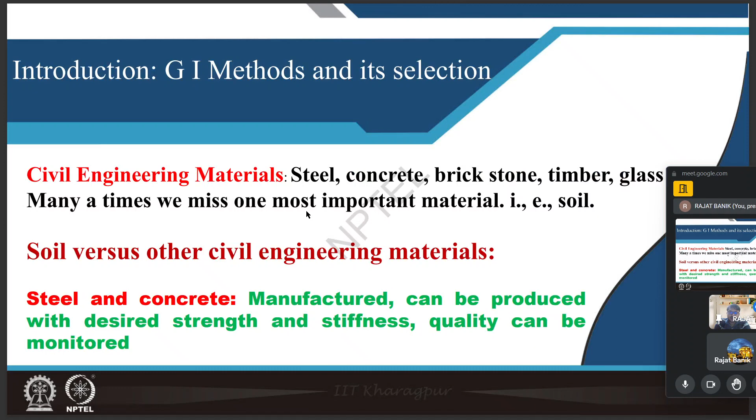In the beginning, we study ground improvement and why we need these ground improvement techniques. Few points were made that like other materials, soil is also a civil engineering material, and it needs improvement because it is formed naturally and its properties are mostly not known or dependent on a manufacturer, with no control over its quality. There may also be increased demand due to urbanization, and we venture into challenging building of high-rise buildings, so we need to improve the ground. For this we use different techniques, that's why we study ground improvement methods.

Then we study the different types of geomaterials and their potential problems. These geomaterials I discussed based on type, natural and fill. In nature we study soft clay, silt, organic soil, loose sand, expansive soil - they are different and have different potential problems, like in soft soil there may be low strength, high compressibility, large creep deformation, low permeability. Silt also has similar types of problems.

Then we study the fill. In fill we study uncontrolled fill, dredged fill, reclaimed fill, recycled material, solid waste and bio-based byproduct material, and also study the different potential problems of these fills. And then we study...

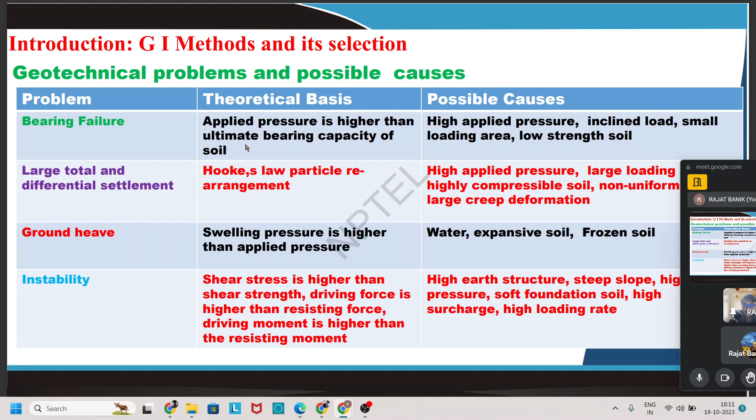Then also other types of problems like liquefaction, erosion, seepage - here also given some causes of why they happen. Liquefaction happens when the effective stress becomes zero, and the soil profile behaves like a liquid. Likewise, seepage occurs due to Darcy's law, you should remember it, it's very important. Then we study ground improvement methods for transportation infrastructure - these are the different types of ground improvement methods used in transportation infrastructure, mostly for improving pavements.

So there you can go through it.

Then we study the classification of ground improvement methods based on different research and different criteria. By Mitchell, it is given by construction and function, categorizing ground improvement techniques based on in situ deep compaction of porous soil, pre-compression, injection and grouting, admixture, and thermal reinforcement.

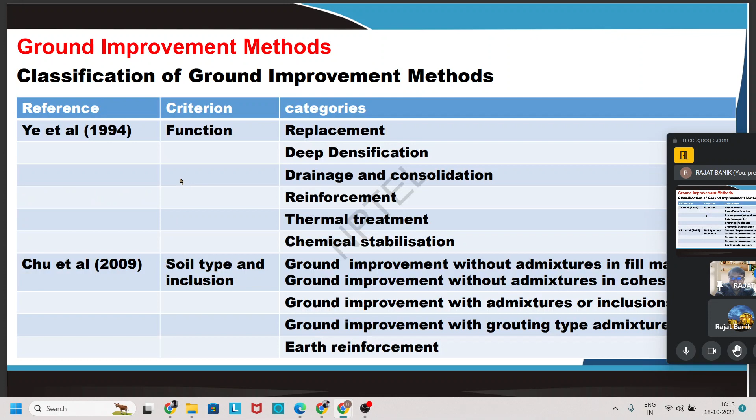Hausmann also classified ground improvement based on process, into four types: mechanical modification, hydraulic modification, physical chemical modification, and modification by inclusion. You can go through it once, as it is not much important. We will elaborately study this now.

Based on our requirement, we divide ground improvement techniques in different ways, like shallow ground improvement technique, deep ground improvement technique, chemical, physical, water or hydraulic ground improvement technique, geosynthetic, and so on.

In shallow ground improvement technique, we mostly use the over-excavation replacement method, and there may be some benefits and some disadvantages. We can also study where this ground improvement technique is mostly applicable. The shallow ground improvement technique is mostly applicable up to a depth of 3 meters. You should remember this.

It is mostly improved by removing the problematic geomaterial and replacing it with good quality geomaterial.

Then we study other surface compaction techniques like traditional compaction, high energy impact roller compaction, and intelligent compaction. We also study where these ground improvement techniques are applicable and how they are applied.

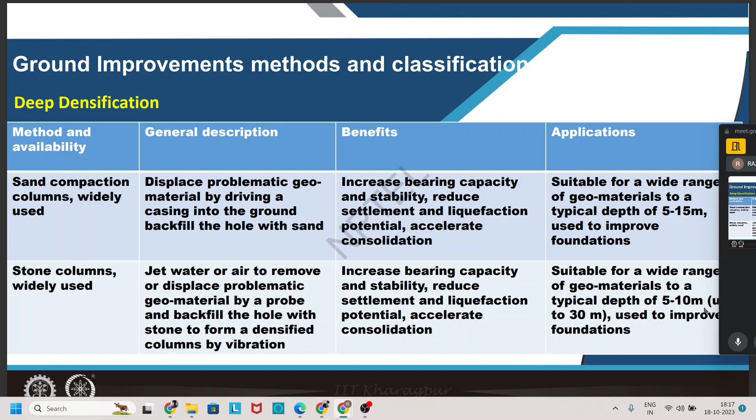Then we study rammed aggregate columns, geosynthetic encased columns, and we see these are applicable up to a depth of 5 to 10 meters.

We again classify ground improvement technique based on drainage, using field drains and drainage geosynthetics. We use these to minimize the possibility of liquefaction in the soil when the groundwater table is close to the ground surface.

By this technique we remove water and lower the groundwater table, also reducing the liquefaction potential.

Then we study other dewatering methods like open pumping and well point systems.

Then we study consolidation methods to improve the ground, like fill preloading and vacuum preloading. This is used to increase strength and reduce settlement in most cases.

We study shallow chemical stabilization, like chemical stabilization of subgrade and base, widely used. This is suitable up to 0.3 meters. By the name itself, it is understood that the depth is not much, so it is up to 0.3 meters.

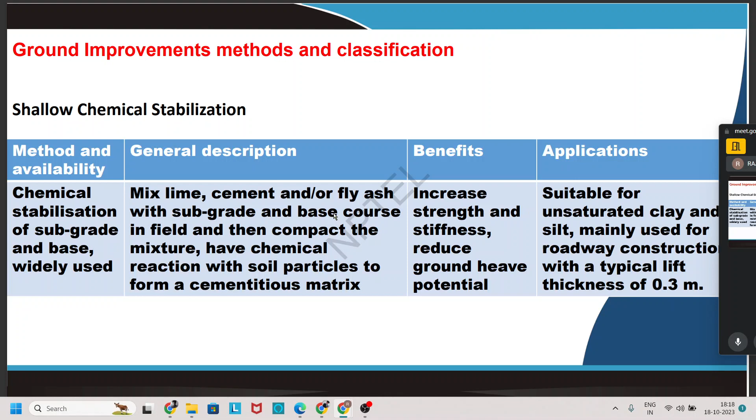Then we study deep chemical stabilization like grouting and deep mixing. Grouting is a very popular technique where we grout good material into the ground and create a hardened mass, improving the ground this way. This grouting technique is mostly used for repairing purposes or temporary work in construction.

Then we study fill reinforcement, which is divided into geosynthetic reinforcement of slopes and geosynthetic reinforcement of embankments. We studied this in the previous class and saw that it increases the stability of slopes and earthwork by inclusion of geosynthetic materials like geotextile and geomembrane. We improve the ground by inclusion of this geosynthetic material.

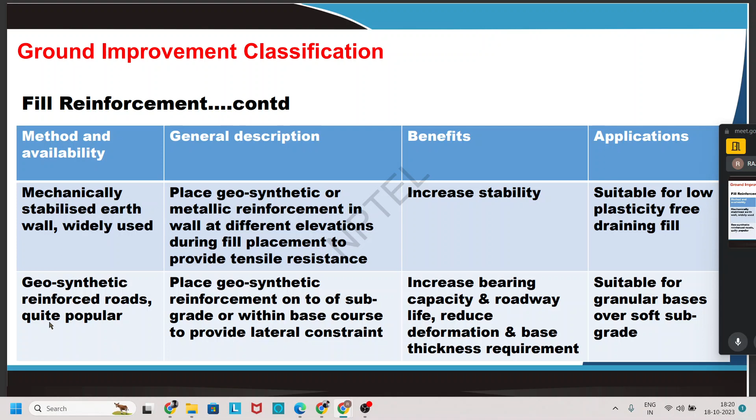Then we study the mechanical stabilized wall. In mechanical stabilized wall, we also solve some problems to find out the stability of this wall, and we also study the geosynthetic reinforced road.

It's very important. Then, in our very first class, we studied the shallow ground improvement technique. The first one is excavation and replacement technique. In this technique, we study that when the depth of the problematic soil is very small from the ground surface, we can replace this problematic soil with a good material.

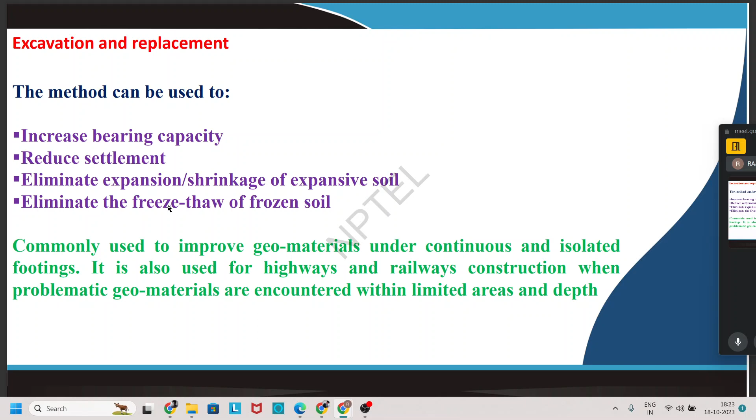Then we study that this technique is useful when the depth is less than 3 meters, and we study that it is mostly used to eliminate expansive or shrinkage type soil, and to eliminate frozen soil. We study the advantages of this.

You should go through it, and we also studied the disadvantages of this technique. So excavation and replacement technique is mostly not used when the groundwater table is very high.

You should remember it. Then we discuss the principle of this study, and the design consideration of excavation replacement. Mostly, the design is based on finding the safe bearing capacity, and we compare whether this soil is capable of taking the load coming from the structure.

If it is okay, then no need to improve. If it is not, we replace this soil or apply good compacted material. After that, we start our construction, and we study the different types of failure modes in this excavation replacement, like general shear failure,

then punching failure, and local shear failure, like this. And we also solve one or two problems using this formula. It is nothing but the safe bearing capacity formula, and all the value coefficients are given, and you should remember it.

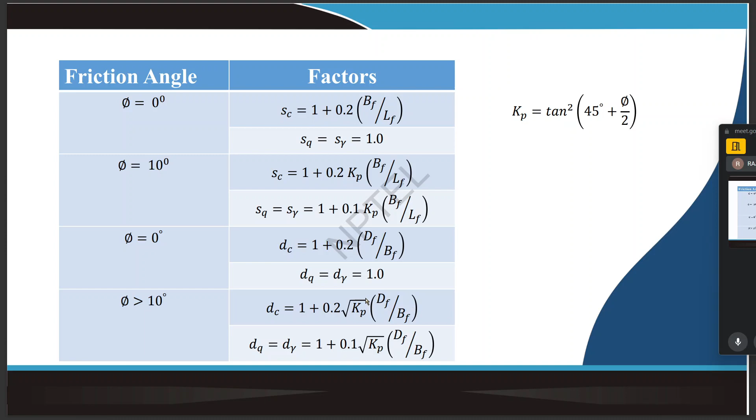Most of the problems are based on phi equal to 0 degree. Also, you should remember what the shape factor and depth factor are when phi is 0 degree. You should remember that Sq and S gamma are 1, and Dq and D gamma are also 1, when phi is equal to 0 degree. You should remember that.

Then, in week 2... please wait, it takes a long time.

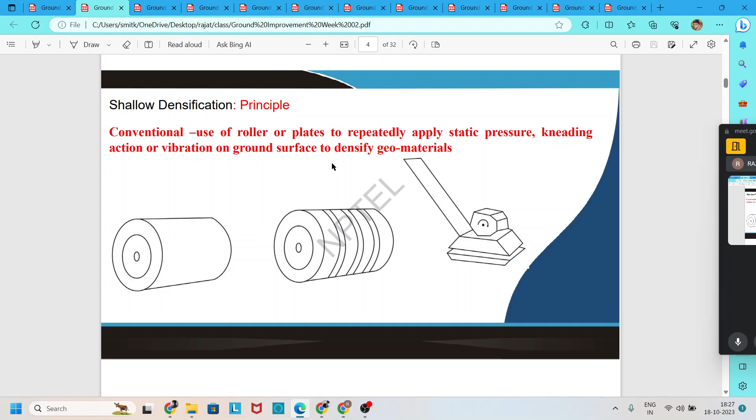Densification takes place. Then we studied the equipment used in shallow densification. There are different types of equipment like sheep foot roller, smooth wheel roller, pneumatic roller.

We study the advantages and limitations of this. You should go through it. It is very important, and this formula also very important.

We solve some problems based on this formula to find out the dry density, which is given bulk density and water content.

Here is given one maximum dry density versus moisture content curve, and you can see there is a theoretical curve due to the zero air void line. It should be parallel to the lower side or right side of this curve.

You should remember it. The left side of this curve is called dry of optimum, and the right side is called wet of optimum, and there are some benefits. You should remember when we use dry of optimum moisture content and when we use wet of optimum moisture content for each type of soil.

Here one curve is also given based on the different energy levels. If the number of blows increases, the curve moves upward, and also the optimum moisture content line shifts to the left side. You should remember this: when we apply more energy, the curve shifts upward, and the value of optimum moisture content shifts left side.

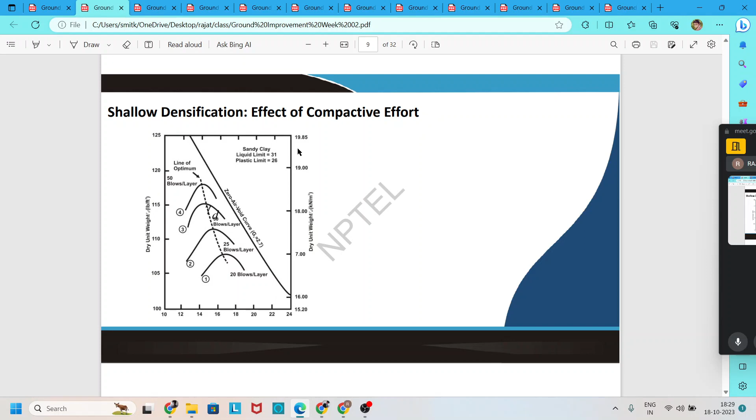If the material is a good material, it requires the maximum density and also requires less optimum moisture content to reach this maximum dry density. You can see different curves given for different types of energy.

Then we study the influential factors of shallow densification, and there may be different types of influence factors like type of soil, moisture content, compaction method, compaction effort, including applied energy, layer thickness, number of passes, relative density or stiffness of this layer.

We study all of this and also solve some problems. Then it is given what type of geomaterial we can use with what type of machine - like for rock fill we use vibratory roller to densify the soil. For plastic soil, which has high compressibility, we use sheep foot roller.

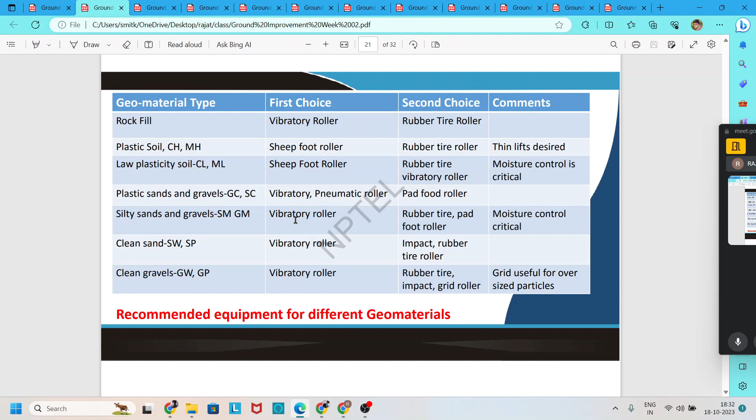You see there are again different types of equipment given and what are the applications or applicability, and we can say the suitability of use of this equipment. You go through it like this.

One problem is given. We solve this problem in our class, and I also uploaded this solved problem on my Google Drive. Let's go through it.

Then in week 3 we discuss about deep dynamic compaction, and there may be different types of deep dynamic compaction like dynamic hammering. We also discuss the advantages and disadvantages.

In deep dynamic compaction, we drop freely a weighted mass on the ground from a certain height, like height is 10 to 40 meters, and the weight of the mass is 5 to 10 tons up to, and that creates some vibration at the ground. Due to this vibration the material comes closer and densifies, and this densification takes place up to a depth of 10 meters.

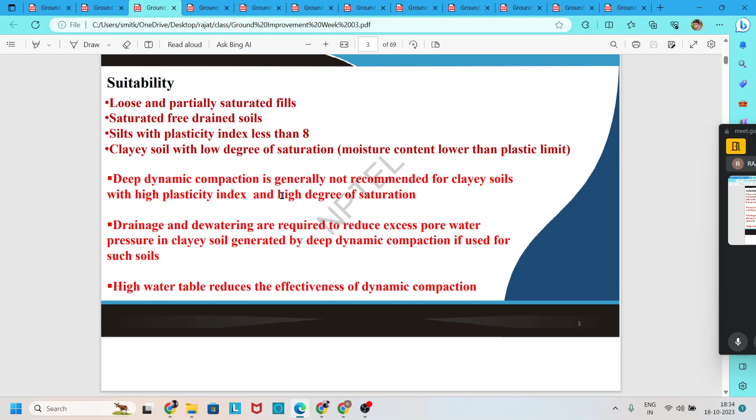We also study the suitability of this technique: the silt percentage, that means plasticity index, should be less than 8, and this technique should not be used for clay soil. For clay soil we use different types of techniques. You should remember this.

We study the adverse situations of this dynamic compaction. It is mostly based on the fact that when the ground water table is very high, we cannot use this technique. Also, if most of the fill material is clay, we cannot use this; we need to adjust something else.

Different adverse situations are given like this. You can go through it once, then see the advantages and disadvantages of this technique. It is a very simple technique; nothing here is very difficult.

Due to this dynamic densification, dynamic consolidation happens, and this dynamic consolidation is mostly used for clay soil, because in clay soil, when we apply energy, it takes time to dissipate the water, and after that it regains its strength. So we can say it is a dynamic consolidation.

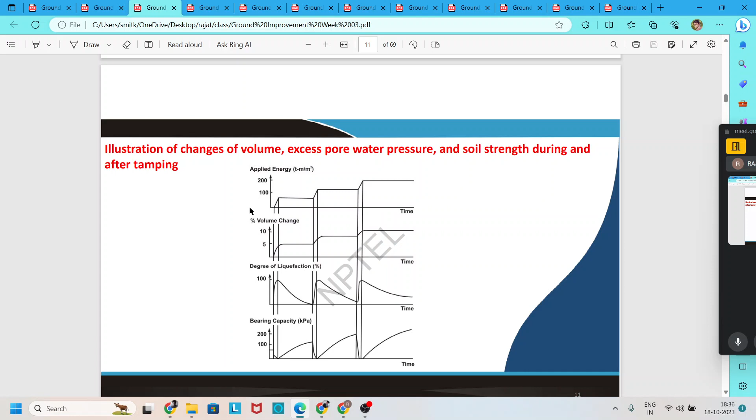Here you can see that for dynamic consolidation, when we apply the energy in the first trial, the volume changes immediately. After a certain period of time, the volume gets constant and reduced. At the same moment, the degree of liquefaction is reduced and bearing capacity increases.

Here is the procedure given in a schematic diagram. First we apply this load up to a certain height, create a free fall drop at the ground surface, and due to this some depression happens. After that, we fill this depression with some good material and compact it again with this heavy hammer, and smooth the surface by normal shallow compaction machines like smooth wheel roller, sheep foot roller, and so on.

Then we study the dynamic replacement method. Before applying this deep dynamic densification, if any compressible layer is present, we can replace it with some good material, and then apply this heavy deep dynamic compaction method by ramming.

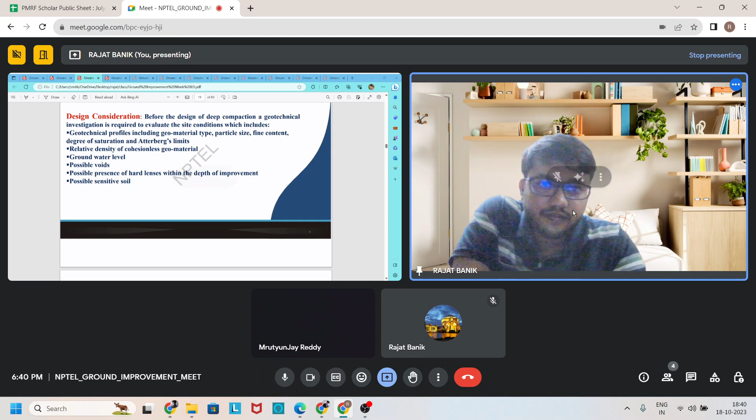Most of the geotechnical design procedure is based on the geo-material type, ground water table presence, and also whether sensitive soil is present or not. You should remember this, but you need not remember that much; just go through it once.

Then, what are the influence factors that govern deep dynamic compaction? It depends on geo-material type, depth of area improvement, tamper geometry, weight, drop height, pattern and spacing, then...

...environmental impact. Also it depends on the presence of soft layer, presence of hard layer. This way, different influence factors govern it.

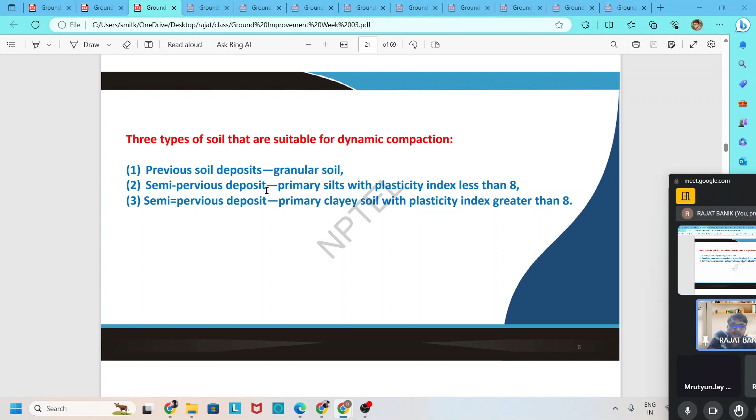Then, soil types for deep dynamic compaction are categorized into three based on pervious, semi-pervious, and impervious. In semi-pervious, it's based on plasticity index less than 8 or plasticity index greater than 8, like that.

Then we design the deep dynamic compaction. First, before designing, we go to the depth of improvement, how much depth we require to improve based on our height and weight of the hammer.

This is found by an empirical formula: Di equals Nc into root over Wt into Hd. Wt into Hd is the energy applied on the ground, and you should remember this term is given in ton-meter. So before solving the problem, consider the units of this term, and Nc is a constant given in the problem.

This technique's depth of improvement for sand is up to 10 meters, and for cohesive soil like clay, up to 5 meters. This is very important; you should remember it.

Here the NC value is given for different geotechnical types and degrees of saturation. For pervious soil with a high degree of saturation, NC is equal to 0.5.

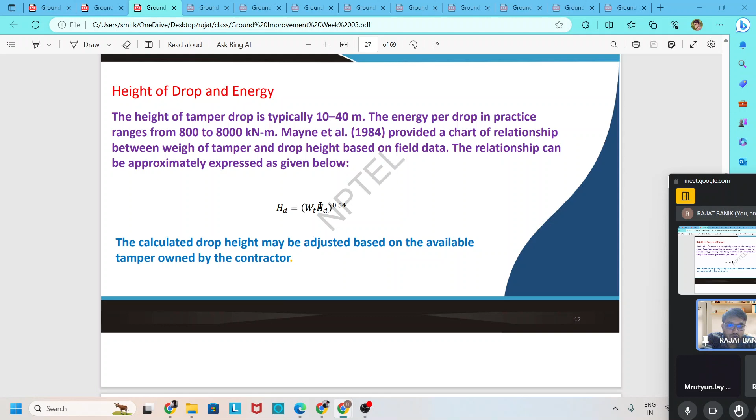After that, for smoothing or leveling, we use the ironing pass, which is based on a smooth roller or sheep's foot roller, like this.

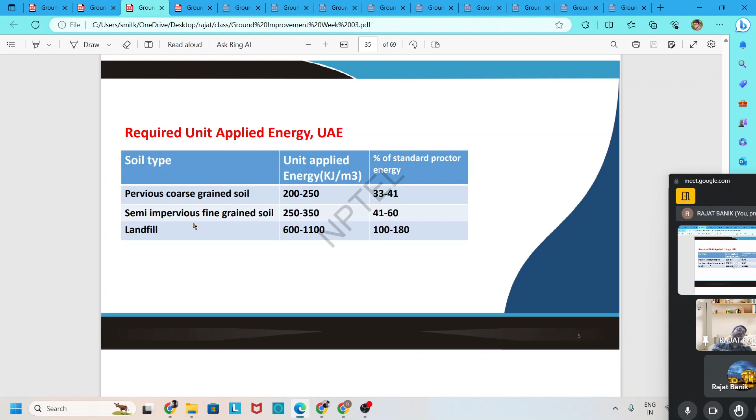We also solved some problems based on this, and you can go through the design criteria of this technique - the induced settlement, that means for different types of soil, up to how much depth this technique works, or how much percentage of soil settlement happens.

Then the most important term is the peak particle velocity.

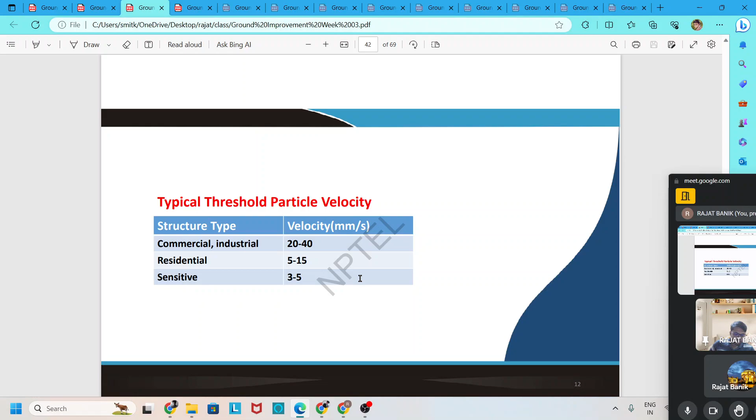For sensitive sites, the peak particle velocity should not be greater than 3 to 5 mm per second. Here is the procedure of this technique: we first prepare the ground, then apply some leveling instrument to find how much depth we require to improve. This may not come in your exam. You should remember the design procedure, design steps, how to design this pattern, and why it is used. We also solve one problem, a very big problem.

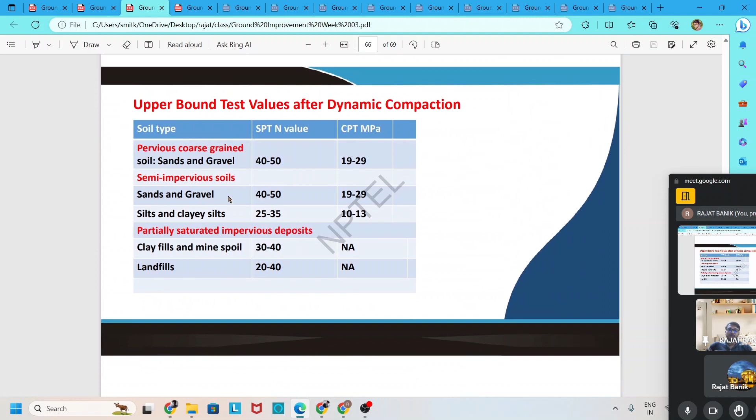It is very important for your exam, and you can go through it. It's a very big design problem. From this problem, you can expect a small portion in your exam. Go step by step and try to solve it by yourself.

Then in week four, we studied rapid impact compaction. It is similar to deep dynamic compaction, but here the drop height is 1.2 meters, and the weight of the hammer is 5 to 12 tons.

It improves the ground up to a depth of 5 to 6 meters, and it is very quick to improve the ground, generating 40 to 60 blows per minute. We also study the suitability.

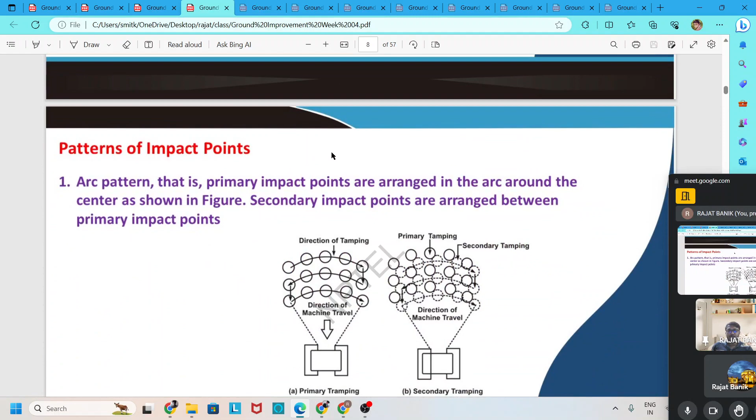Most of the case it is suitable for granular soil, improving the ground up to 6 meters. We study advantages, disadvantages, design considerations, and it is similar. We also study pattern types like square pattern, triangular pattern, and tertiary, with the pattern scaled down into primary, secondary, tertiary.

In primary, the spacing is very large. In secondary, we reduce the spacing, improving the ground in between these two points. In tertiary, which is the last trial, we further reduce the spacing.

Again, the same formula used in deep dynamic compaction is used to find out the applied energy. We also take care of the environmental impact by finding out the peak particle velocity through this empirical formula.

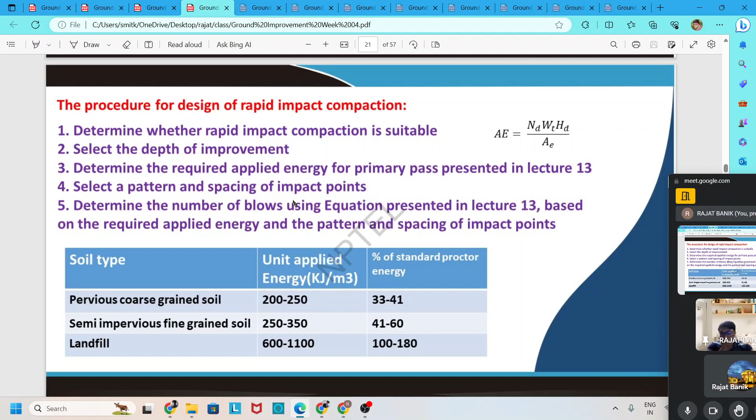By this formula we also solve some problems, and this problem I uploaded to my Google Drive. Please go through it. The solution is also uploaded to the Google Drive, please go through it. Construction procedure: you should go through the problems and the formulas and why it is mostly used, and also go through the different tables given for different types of functions. One by one, go through it.

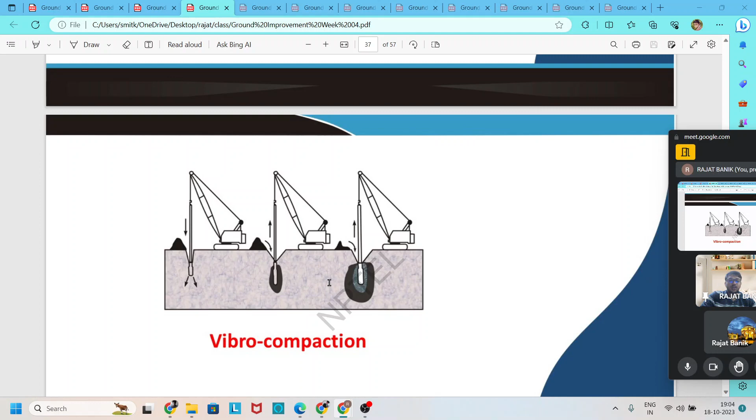We can see this in the picture also: one probe is driven, vibration is created, and there may be some void place created due to the vibration. Particles get closer, and we put some good material on it to improve the ground. This vibrocompaction is suitable for densifying deep deposits of cohesionless geomaterial with up to 20% fines, but less than 2 to 3% clay.

Application, advantage, disadvantage, mechanism is like that. We use this vibrocompaction and generate some force. If the vibration acceleration is greater than 0.5g, then only does the particle-to-particle force break down and compaction take place.

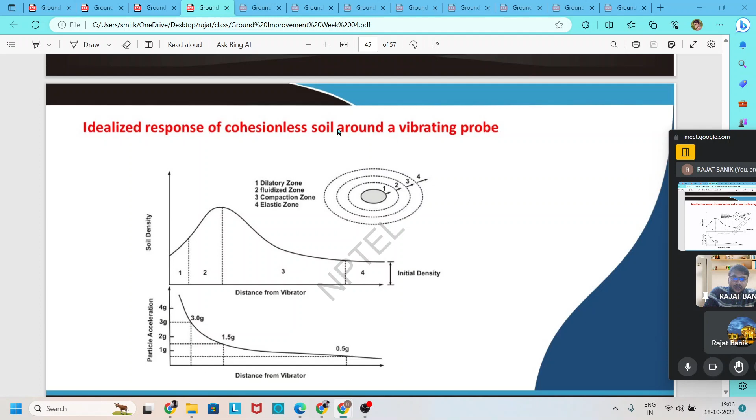So due to this vibration, four zones are created: dilatory zone, fluidized zone, compaction zone, and elastic zone, based on the acceleration. If the acceleration is greater than 0.5, then only this type of four zone is created. Most of the densification takes place at the border of the fluidized zone and compaction zone. We should remember this.

So, I think my presentation is... yes.

We also study one theory to find out the settlement or volume change without backfilling. By this formula, S by H is equal to e naught minus e1 divided by 1 plus e naught. We find out the required volume change of soil without backfilling. S is the depression, H is the height or thickness of the layer.

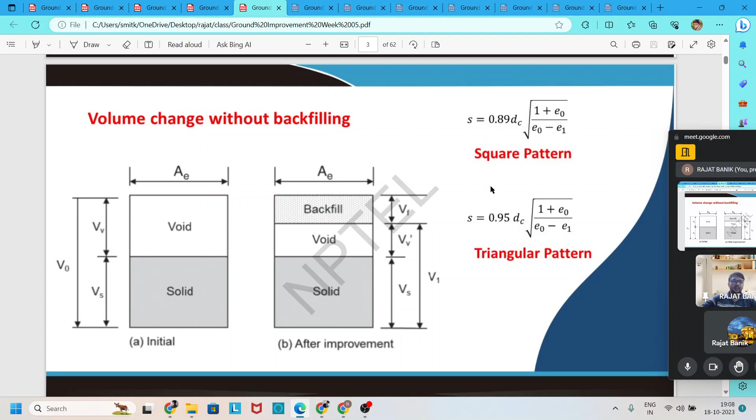In Week 5, we find out the volume change without and with backfilling, and the spacing for different patterns - square pattern and triangular pattern. By this formula we also find out the spacing for triangular and square pattern.

You should remember this formula. It is helpful to solve your exam problems, and I think most of the problems come from this basic formula.

There are also some assignment problems given based on this formula. Try to solve all the assignment problems of this year, and also try to solve the problem questions from previous years.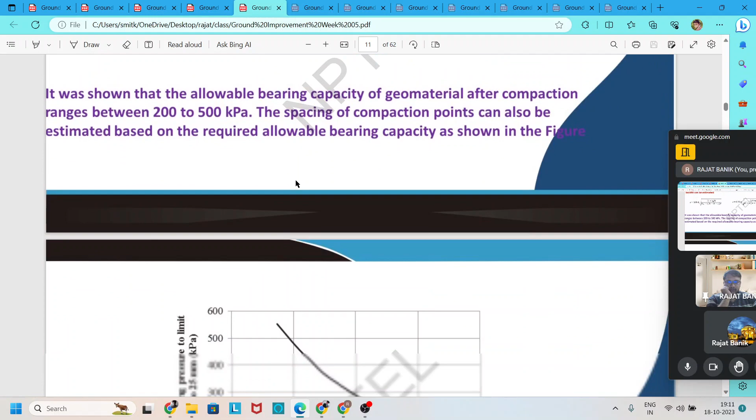We study the design parameters for vibrocompaction. It depends on geometrical types, fine content, percentage of clay particles, thickness and depth of the problematic material, depth of groundwater table, initial void ratio, relative density of the material, target void ratio, then pattern spacing, and area of improvement. There's some explanation given for this - we'll go through it once.

The equivalent radius for square pattern is 0.564 into spacing; for triangular pattern, the equivalent radius is 0.525 into spacing. You should remember this too - it is very useful to solve the problems.

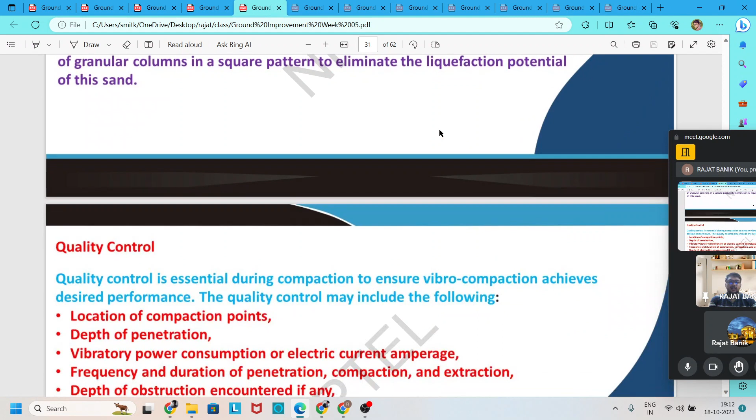One problem is also solved based on this formula. Here one design problem is also given based on vibrocompaction, where particle size and fine content is given. All the solutions are uploaded in this Google Drive, week-wise - every week I am uploading some problems, so we go through it.

Then, quality assurance and quality control - when it is required.

Then we study deep replacement, which is similar to vibrocompaction. In vibrocompaction, we do not replace the problematic soil.

But in deep replacement, we first remove the problematic soil at a depth and apply good material. After that, we apply some vibration force and compact the ground. There are some basic concepts given - we use vibro replacement, and there are different types like vibro replacement, vibro displacement, vibro concrete column, controlled modulus, and stiffness column.

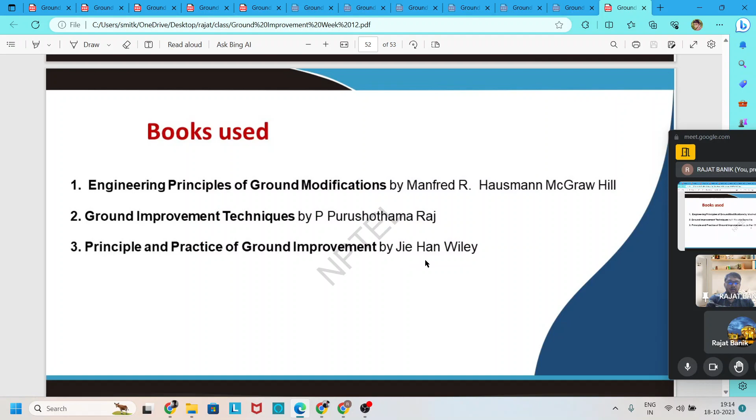All of this theory is actually taken from one book, Engineering Principles of Ground Modifications by Hausmann - we can go through this book. Also, Principle and Practice of Ground Improvement by Jie Han - you can go through these books. Every problem and every theory is taken from these books.

Here, deep replacement is again categorized by dynamic displacement and also replacement.

Removal takes place by injecting water, also by drilling a hole, and then taking out the problematic soil and replacing it with good soil. Displacement takes place by injecting air, by driving steel casing, by driving reverse flight, by dropping a tamper, and like that.

As for suitability, it is based on different particle sizes. Vibro compaction is mostly suitable for cohesionless soil, that means from gravel to fine grain sand. The vibro replacement method is mostly suitable for fine grain sand to clay soil, and this technique is used to improve soil after a depth of 10 to 15 meters.

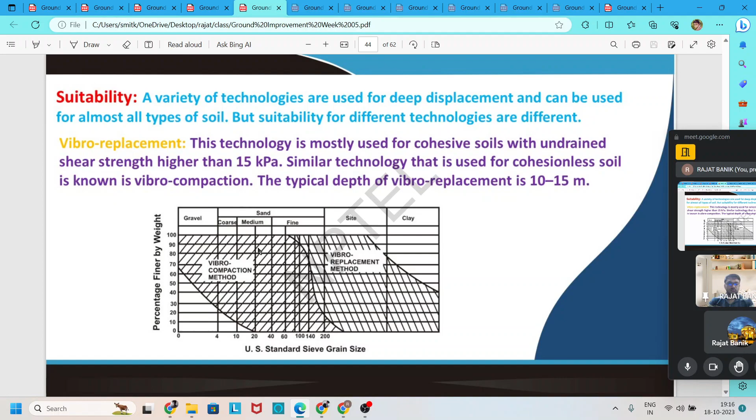Now let's discuss the advantage and disadvantage of vibro sand compaction columns or stone compaction columns. By vibro replacement, we can create two types of columns: sand compaction columns and stone compaction columns. The sand compaction column uses sand to replace the problematic soil, while the stone compaction column uses small stones like gravel to replace the problematic soil.

There may be some difficulties and also advantages, which we can go through for different types of soil. Now for stone compaction columns, we study the load transfer mechanism, that means the equal stress method versus the equal strain method.

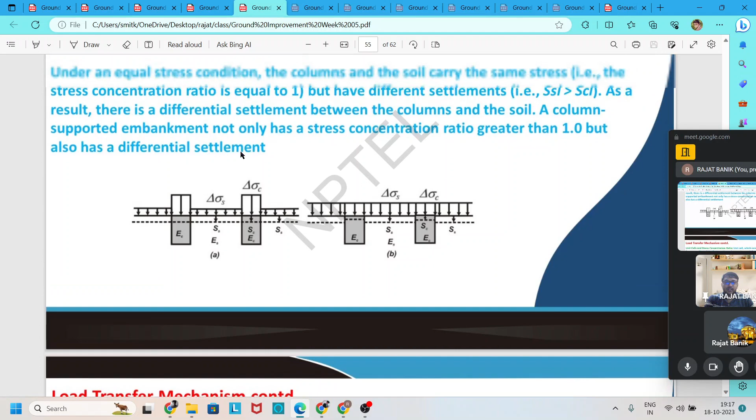In the equal stress method, the stress between the soil and the stone column is equal. In the equal strain method, the settlement between the stone and soil is equal.

Based on our requirement, we use different types of methods. The equal strain condition happens under rigid loading, while the equal stress method happens under flexible loading. Remember, rigid loading means rigid footing, and flexible loading means tire pressure. This way we solve our problem.

Here the stress concentration ratio is given, which is the ratio of the stress on the compaction stone column to the stress created on the surrounding soil. This is further equal to the constrained modulus of the stone column divided by the constrained modulus of the surrounding soil.

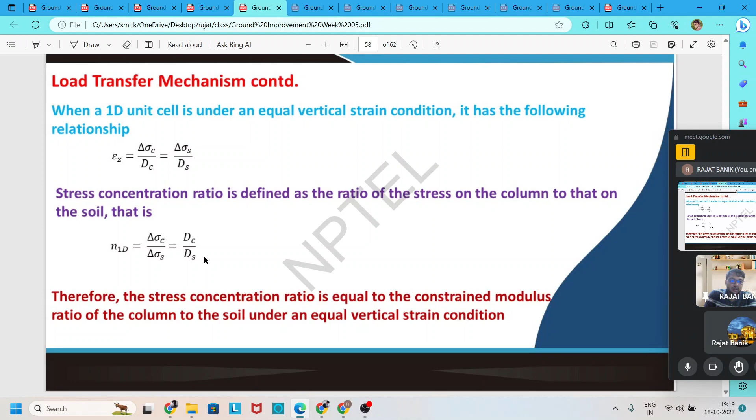Some formulas are given to find out the stress between these columns and the surrounding soil. Here the different failure modes are given: failure by bearing, failure by skin friction, and bulging, which happens between 2 to 3 DC, where DC is the diameter of the stone column.

Go through this, it is very important and may be asked in your exam: tell the different types of failure modes. The first one is failure by crushing, if the material strength is less then it fails. The second one is failure by bearing. The third one is failure by skin friction. The fourth one is failure by buckling.

In week 6, we study drainage. There may be different types of drainage techniques we use, like drainage, dewatering. Drainage is mostly used to expel water from the ground and lower the groundwater table. This is useful because this water increases pore water pressure, reduces effective stress, and there is a possibility of liquefaction during an earthquake.

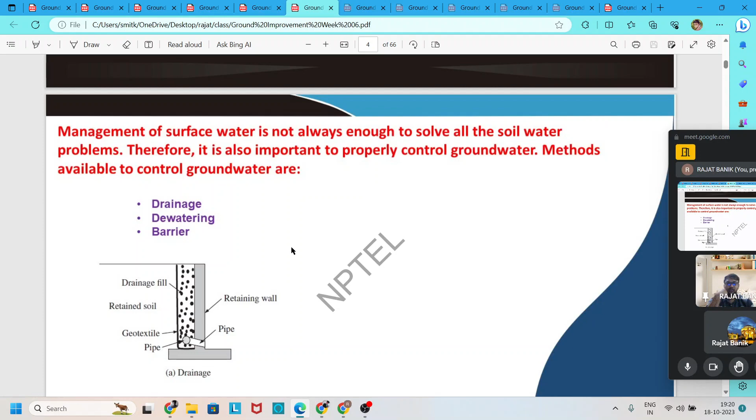We go through different types of drainage: granular drain, synthetic drain, combined drain. By application we cover trench drain, pavement drainage, retaining wall drain, chimney drain which is used for dams, then vertical drains mostly used for compressible soil layers, then interceptor drain or toe drain.

We go through the advantages and limitations of this drainage technique.

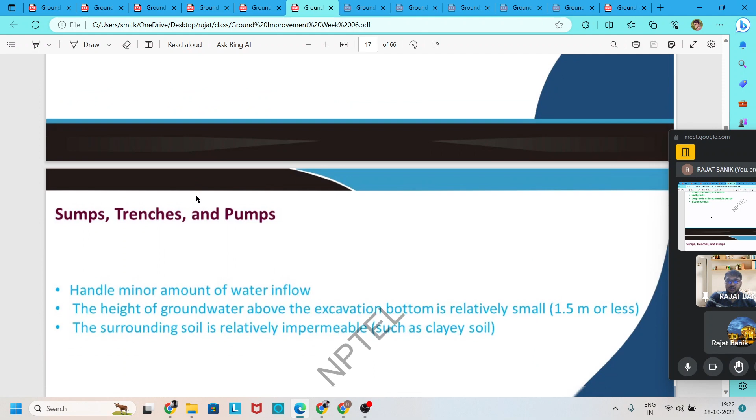Then dewatering, which expels water from the ground through pumping tests like well points, deep well points, electroosmosis dewatering from soil, along with the advantages and disadvantages of this technique. We must go through these points, including pattern spacing required for dewatering during pumping out of water.

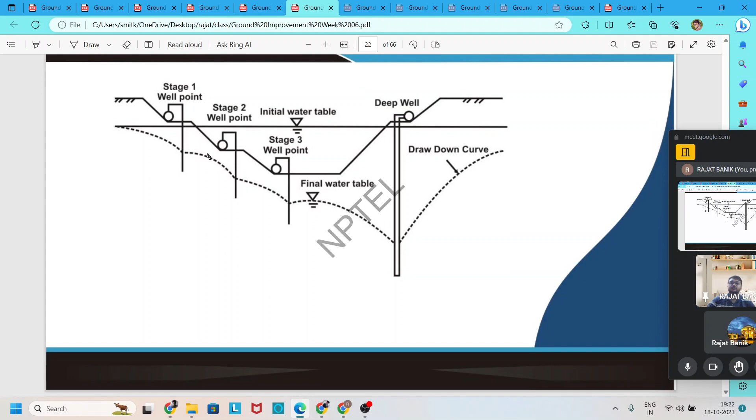There are two types of dewatering: deep dewatering and shallow dewatering. For deep dewatering we use deep wells with submersible pumps. For shallow dewatering we use well points for different depths, stage 1, stage 2, stage 3. Sometimes we also use deep wells with an auxiliary vacuum system.

We use this method, then electroosmosis.

Stage wise, stage one, stage two, for deep dewatering we use vacuum well dewatering, which is also up to 5 meter. Then jet eductor, well point, deep well system, electroosmosis - these are the techniques we use to dewater from the ground.

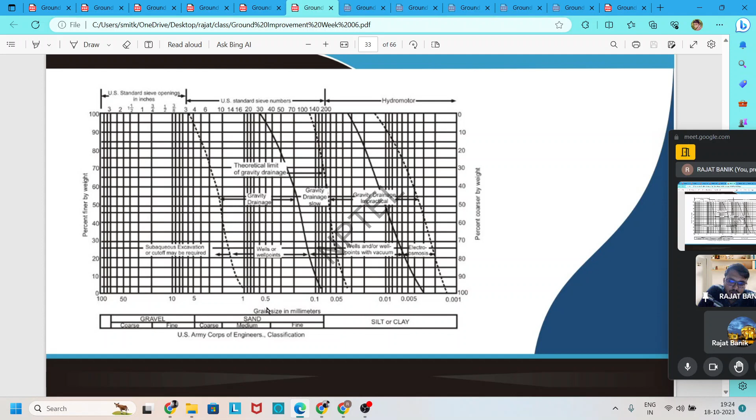Then suitability based on particle size - this chart shows which dewatering technique is suitable for what type of material. For particle size from 1 to 0.001, most gravity drainage dewatering is used, well point is used, also electroosmosis is used. You should once go through this chart.

Then the application of this dewatering technique to control groundwater, and we also study the advantages and limitations. The limitation is that while dewatering, we check the adjacent structure because dewatering causes effective stress to increase as pore water pressure reduces. Due to this increased effective stress, soil particles may come closer and settlement happens. If there is any existing structure nearby, there is a possibility of collapse due to this settlement. You need to check this when applying this dewatering technique.

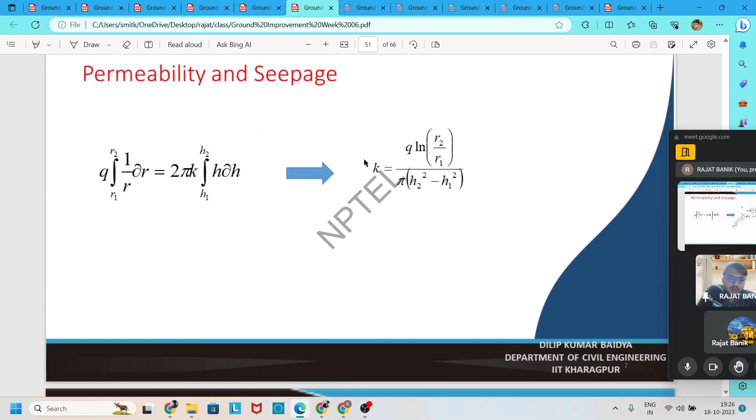Here one formula is given to calculate the dewatering pump discharge. This dewatering technique is used for unconfined and also confined aquifer, and by this way we find the discharge. This dewatering is mostly applied based on Darcy's law, and by this way we find the different discharge area of these well points, height of the well point, thickness of the well point, and also find the permeability required for this well point.

For different types of aquifer, you should go through this formula, remember it, and then we can try to solve different problems based on this. We should also study the drawdown curve - mostly it is like a parabolic type of curve created around the well point.

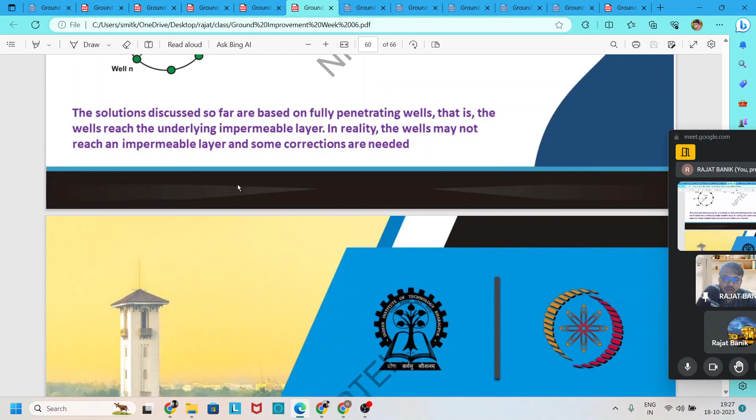If we use two well points surrounding the construction site, it is easy to draw down the water table. Then multi-well system, we find out the combined discharge of this multi-well system, then equivalent circular well multi-well system. We go through and try to solve this problem - the solution is given on my Google Drive, so you can solve it from there by reference.

In week 7, we study consolidation, the basic concept of consolidation. Please go through all the basic concepts for every technique and the major principles. Like pre-consolidation - we actually consolidate the soil before construction up to a certain settlement, so that after construction there is no possibility of further settlement.

We study pre-consolidation, which depends mostly on the weight of the structure and also the type of soil. Most cases it is used for clay soil, or we can say impermeable soil.

We accelerate the dewatering through surcharge loading for pre-consolidation. We also sometimes use vertical drains, sometimes sand drains. Due to this, the drainage path is reduced, and this reduces the time of consolidation.

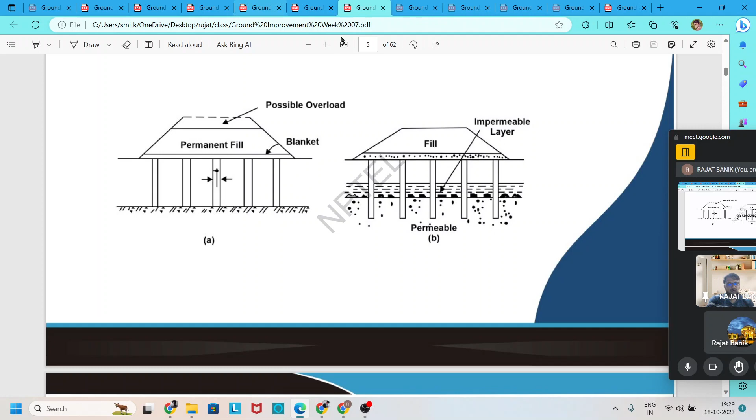You should remember some properties of this drain - the diameter of the drain should be between 300 to 600 mm, and the spacing is between 1.5 to 4.5 meter. The pattern of spacing, triangular pattern, square pattern, you need to remember.

Then the application of this preloading - it is mostly used for highways, airports, land reclamation, storage tanks, buildings - along with its advantages and limitations. Then we find out the settlement, also called strain effect, using MV (coefficient of volume change), dp (change of stress), and H. By this formula we find the settlement during pre-consolidation.

To find the degree of consolidation, we use the three-dimensional consolidation theory, because when we use the vertical drain, the consolidation drainage takes place surrounding this vertical drain. So we use the three-dimensional consolidation equation, S square equals pi R square. We find the equivalent radius of this drain, which is similar to the pattern used in deep dynamic compaction.

This is for radial drainage consolidation. By this chart also you can find out n, which is the ratio of the radius of the influence area to the radius of the drain. Based on this n, we find out the degree of consolidation versus time factor.

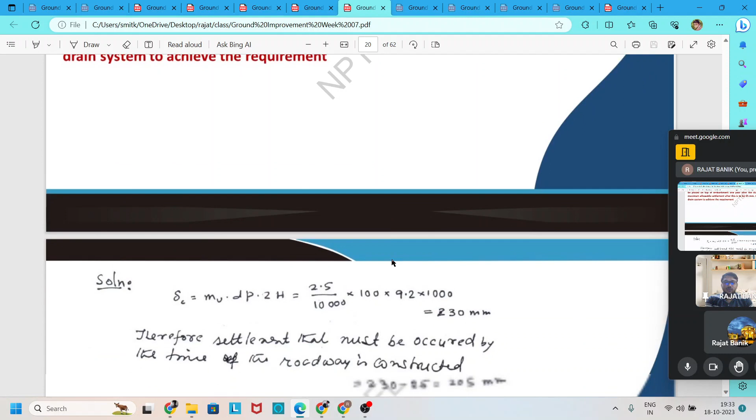Please go through these formulas once and try to solve this problem. The solution is given here as well. So try this problem once.

Then again, for increasing efficiency, besides sand drains, we use prefabricated vertical drains. While using the prefabricated vertical drain, we use one formula to find the equivalent diameter of this prefabricated vertical drain, which is equal to 2 into a plus b divided by pi, where a is the length and b is the width.

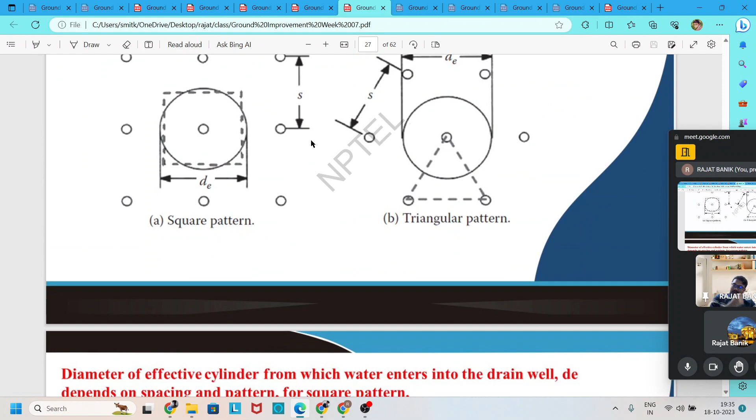So by this formula, we find the equivalent radius, and after that we solve the problem. We then apply this in our consolidation theory, because this consolidation theory is based on the radial direction. So we convert our prefabricated vertical drain into a circular drain, then apply this consolidation formula to find out the degree of consolidation and time factor.

Here the formula is given. When the degree of consolidation is less than 60%, t is equal to pi by 4 into degree of consolidation square. When the degree of consolidation is greater than 60%, t is equal to 1.781 minus 0.933 log 10 into 100 minus degree of consolidation.

We also solve one problem here, so go through this problem. If you solve this problem in percent consolidation, it is enough. Here is the problem, and also the solution is given. Go through the problem, and then the design steps.

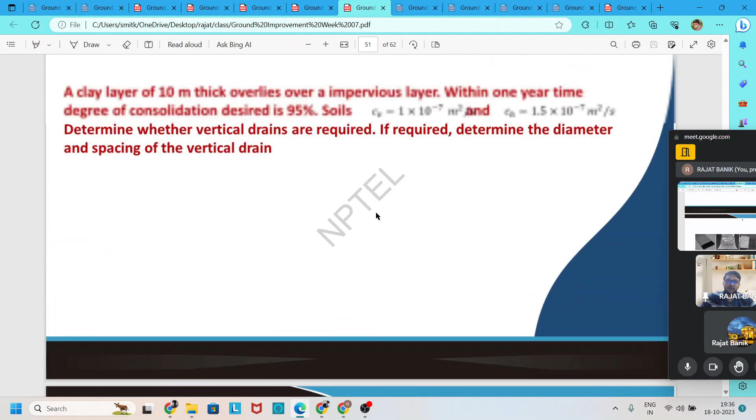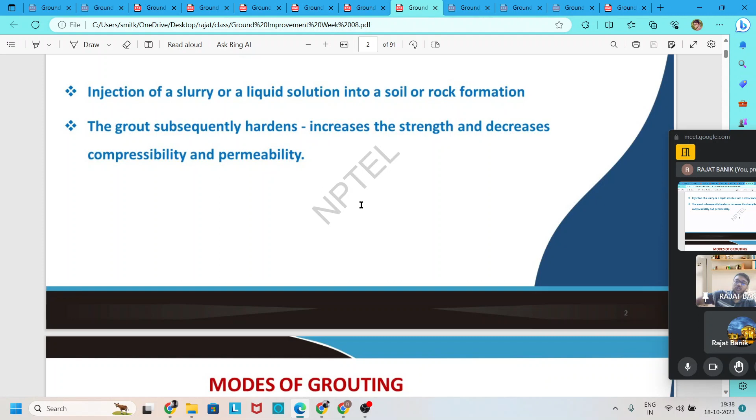Then in week 8, we study grouting. In grouting, we inject some slurry into the soil, and after that this slurry becomes hard, and a hardened mass is created, increasing the strength and decreasing the compressibility and permeability.

The modes of grouting, how we use it differently, include permeation grouting, compaction grouting, controlled displacement grouting, hydraulic fracturing or uncontrolled displacement grouting, compensation grouting, and jet grouting.

Then applications of grouting include densifying granular soil, raising settled structures for repairing purposes - if an existing structure has settled down, we can apply grouting to raise the structure. We can also use it for settlement control, underpinning of existing foundations, excavation support, protection of existing structures during tunneling, liquefaction mitigation, and water control.

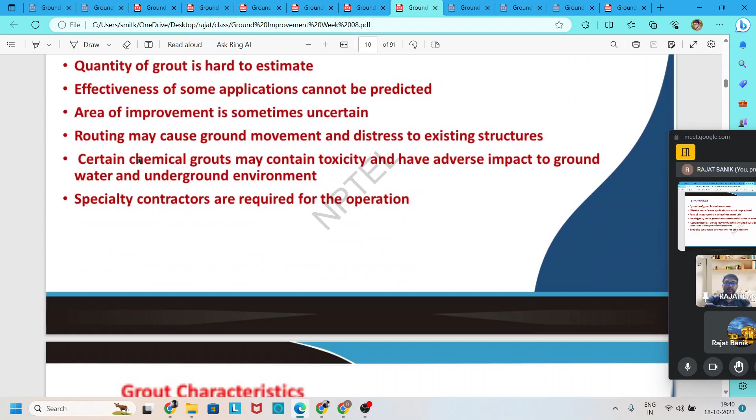The advantages of grouting, limitations of grouting, and characteristics - most grouting depends on groutability, stability, setting time, permanence, and toxicity. Groutability is defined by the groutability ratio, meaning the diameter or size of the particle which is 15% passing or finer in the soil, and the size of the grout which is 85% finer.

By this way, find out whether grouting is required or not. The stability and setting time matters. Late setting causes the grouting to be washed out if seepage occurs, while early setting causes difficulty in the grouting reaching its destination. So the setting time should be in between - not very early, also not very late.

Then we need to consider the toxicity of material used in the grouting. If the groundwater table is very close to our application, this technique should be avoided because some toxic material is used in grouting.

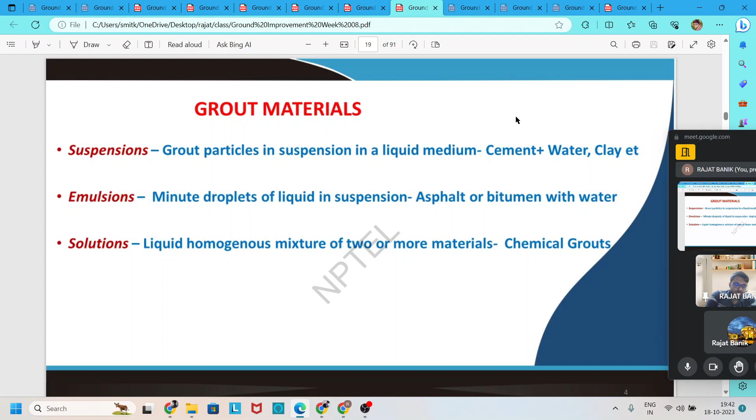Then types of application of the grout - permeation grouting, where it is applicable and its suitability, compaction grouting and its suitability, and jet grouting like this.

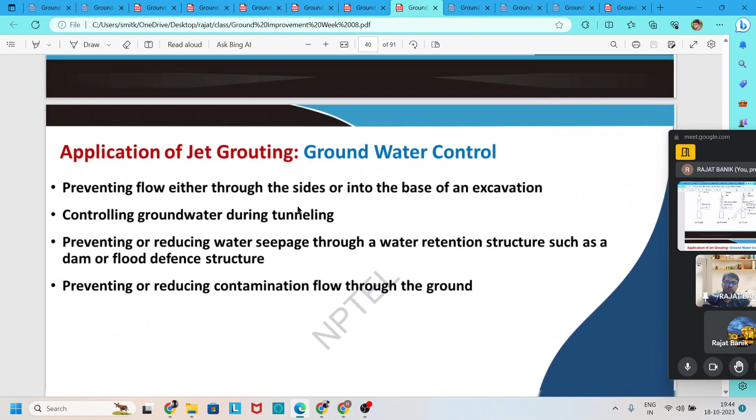The jet grouting is mostly used to control the groundwater table, groundwater control. Also used for ground movement, also used as a support, and used for environmental purposes also. We need to consider this. Then soil fracture grouting and its different applications.

And the theory of injection - the amount of grout used is based on Darcy's law, to find out the head of pressure used while using this grouting, then influence area of this grouting, then permeability of this grouting material, and time taken to reach the targeted point. By this formula we also solve one problem.

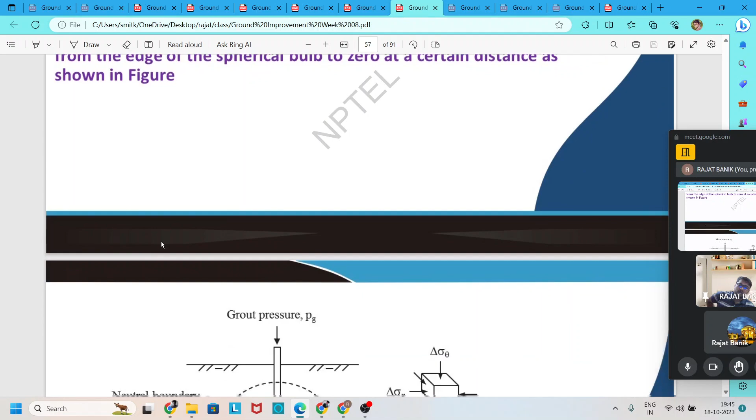Compaction grouting has some theories given, you can also skip this, but you should remember the direct formula used to solve the problems. We should remember this, and the percentage change of the unit void. We should also remember this.

The pressure required for jet grouting - you should remember the formula directly for this. You can try to see the problems solved in your class, and by this formula just solve the assignment problem. By this problem, whichever formula is used to solve it, up to that much formula you can remember. You need to go through every step, and also the derivation of this formula for exam purposes.

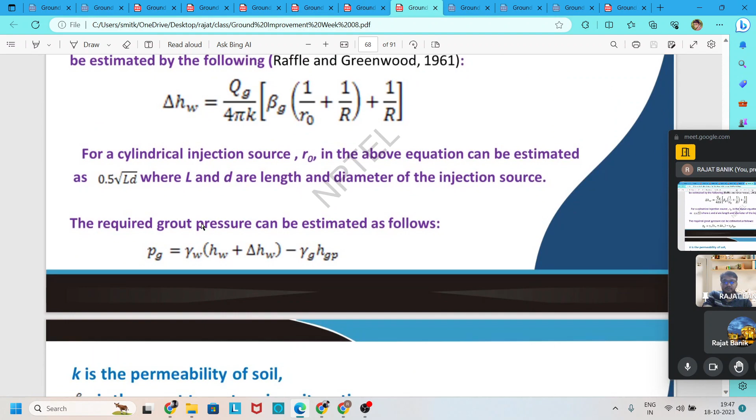Head pressure required while applying the grout, then grout pressure required. Also, we find out the time required to reach the targeted point by this formula, and also solve some problems. You should go through every problem.

Then in week 9, we study chemical stabilization, the soil stability, the chemical stabilization, need for the chemical stabilization. In most cases chemical stabilization happens by lime, where we use quick lime, lime kiln dust, hydrated limes, and also for chemical stabilization we use cement, class C fly ash, class F fly ash.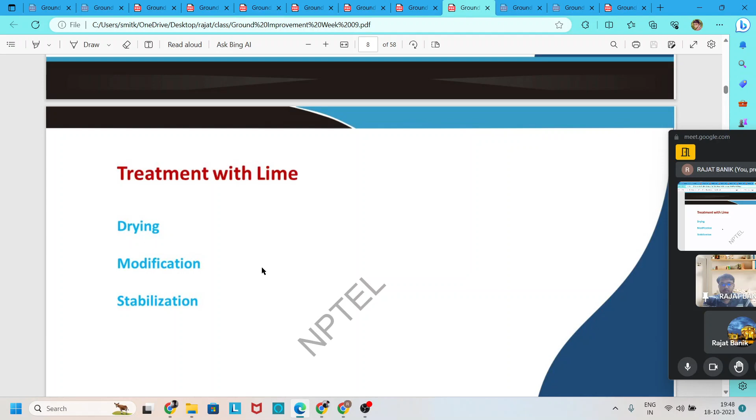Then treatment with lime, like drying, modification, and stabilization. Lime is used for drying, also you can use it for modification, and for stabilization. You go through the principle or procedure of this lime stabilization.

Chemical exchange also you can go through with lime, the benefits of this lime for construction of lime base. Here some figure is given.

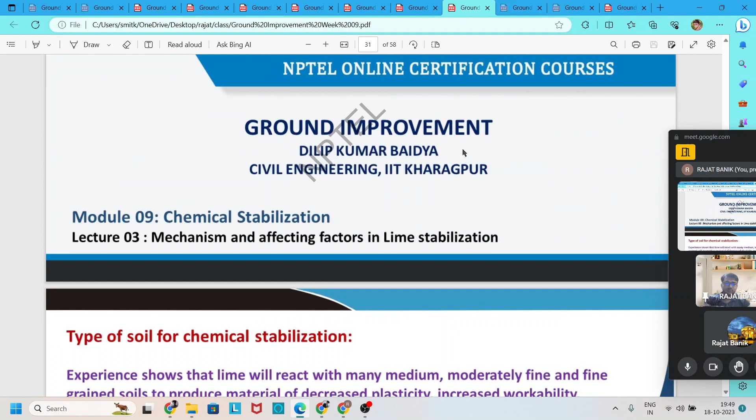Then type of soil for chemical stabilization, which is suitable for chemical stabilization, we can go through. Then mechanism of chemical soil stabilization with lime.

Here the procedure is given, reaction is given, we try to remember this. Due to the reaction with lime, there is one material created, which is chemical calcium silicate hydrate and calcium aluminate hydrate. These two materials act as a binding material, or we can call it cementitious material, which is further used as a bonding between the particles. So you remember these two terms.

Then the factors affecting lime stabilization - it depends on the soil type, lime content, compaction, curing type, and admixture.

Here we further explain all of this one by one.

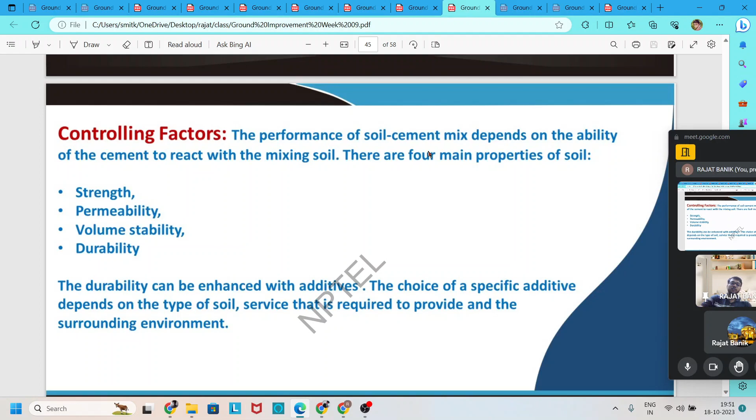Then stabilization success with cement: strength, permeability, volume stability, durability. These are the controlling factors while using cement stabilization for soil stabilization.

It's a mechanism of stabilization, similar to lime stabilization also. Then building of soil cement, mixing, mixing in place, curing, compaction, spreading cement, cost.

Concerns of using lime and cement stabilization: you should remember that both are toxic in nature. While applying to stabilize the ground, you should remember some points, like the ground water should be much below our targeted point, and also some precautions are required while applying these chemicals.

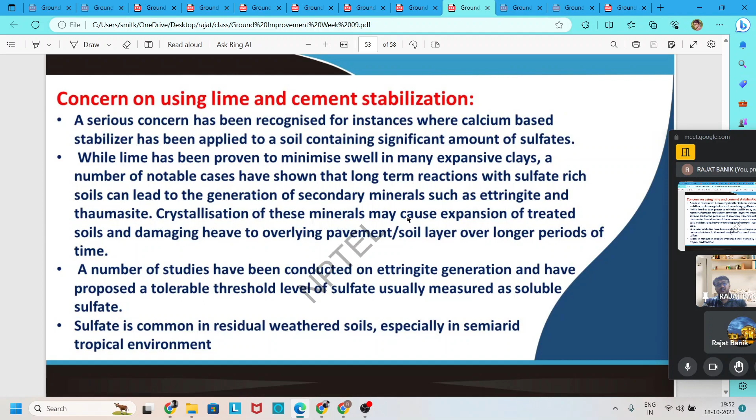Then you also use fly ash as a chemical stabilization because it has also some cementation nature. So we use this to improve and as a replacement of soil cement, also with cement, so the requirement of cement gets reduced and it may be cost effective.

So in week 10, we discuss soil nailing or anchorage. We studied soil nailing, like different types of soil nailing: grout nails, self-drilling nails, jet grout nails, helical nails, driven nails, shooting nails. Then we study the force acting and suitability of soil nails.

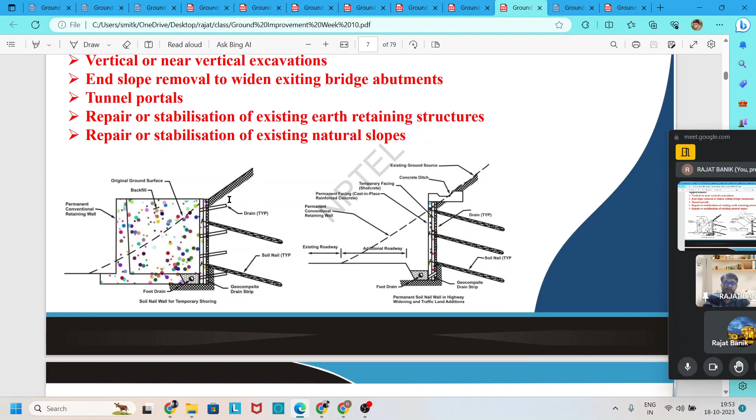Then we study where we cannot use soil nailing. We also study like dry and poorly graded cohesionless soil - we cannot use this soil with high ground water table, we cannot use this. Weathered rock with weak planes, we cannot use this. We should remember this. And then application of soil nailing, advantages, disadvantages, then different types of failure modes.

It is very important for your exam purpose. The first one is internal failure - like pull out failure, nail-soil pull out failure, bar-grout pull out failure, nail tensile failure, nail bending and shear failure. Just remember the names.

External failure: we study compound failure, sliding failure, global failure. Global failure happens when the base fails. Sliding failure happens when the horizontal force is greater than the resisting force. Compound failure happens at the toe of the wall.

Then face failure, like flexural face failure, facing punching shear failure, headed stud failure, that means connection failure. There are some stress distribution curves or force distribution curves shown based on the distance or failure surface. We go through it.

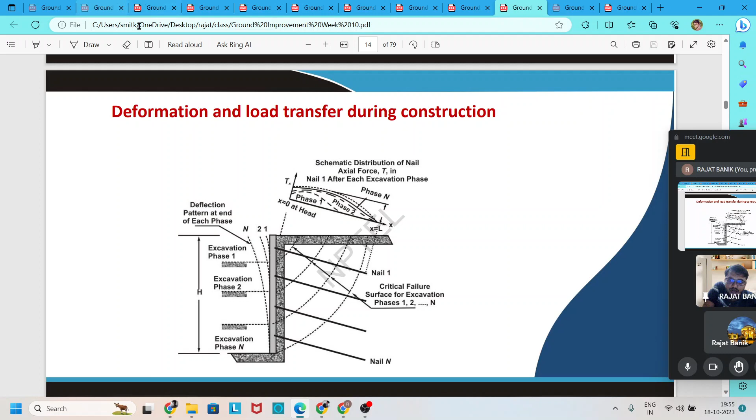We see that there may be defined active zone and resistant zone. The active zone is defined as the failure zone, and the resistance zone is defined as the good soil or contact soil. If we apply soil nail, the force distribution is such that the shear stress in the active zone is towards the face of the wall, and the shear stress in the resistance zone is in the outer direction, or opposite direction, of the face of the wall.

Then different types of wall we can see here: MSE wall (mechanically stabilized earth wall), soil nail wall, anchor wall. For different types of wall, there are different types of pressure distribution. For this, we use different types of arrangement, and we see formulas and some basic design considerations.

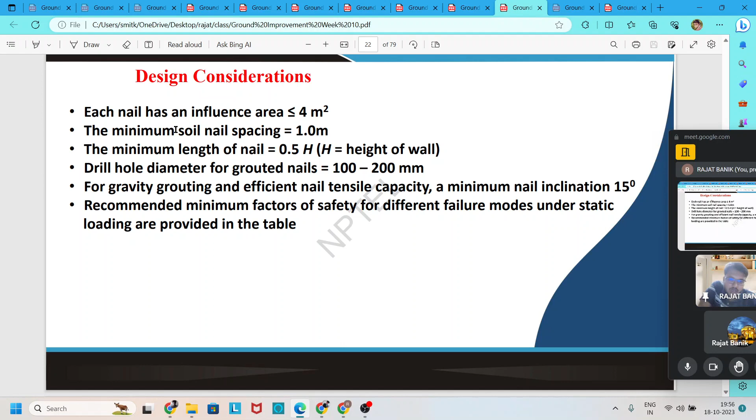Each soil nail length has an influence area less than 4 meters square, and the spacing of the soil nail is 1 meter, and minimum length of the soil nail is 0.5 H. The drill hole diameter is 100 to 200 mm. We solve by these formulas, we solve some problems also. You directly go through this problem and try to remember the formulas used in it.

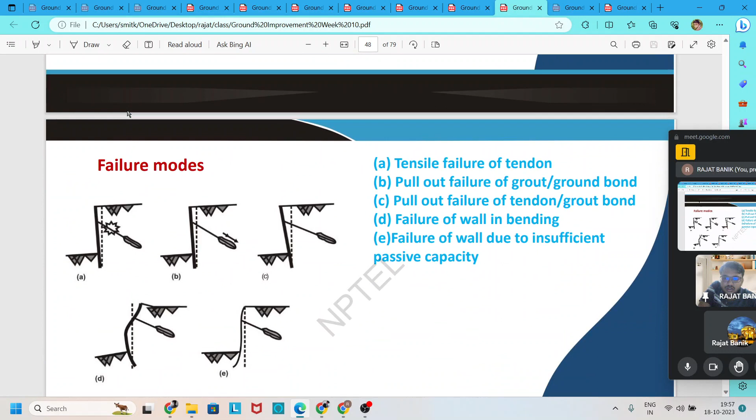Then we discuss the soil anchor, similar to soil nailing, but the failure mode is different. So for soil anchor, go through the basic concept, suitability, application, limitation, and advantages. So pressure distribution, load distribution mechanism, load transfer mechanism.

The basic concept is that in soil nailing, the load distribution happens also in the active zone or failure zone. But in anchors, the load distribution occurs only in the good soil, not in the active zone or failure zone. We should remember this.

There may be different failure modes of anchorage, like tensile failure of tendons, pull out failure of grout, pull out failure of tendon, failure of wall in bending, failure of wall due to insufficient passive capacity, failure by forward rotation, failure due to insufficient axial capacity, failure by overturning, failure by sliding, and rotational failure of ground mass.

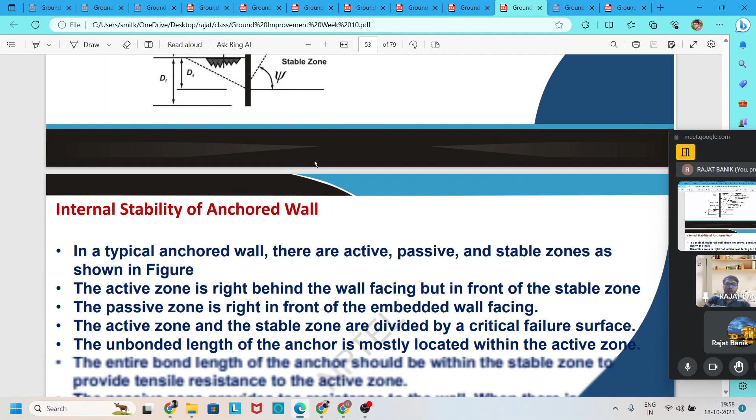Some problems and specifications are given in our class. Please go through this problem.

Then coming to week 11, we study geosynthetics and ground improvement. In this, we study the different types of geosynthetic material like geogrid, geotextile, geonet, geocomposite material, geomembrane, and also the application and function of geosynthetics, like reinforcement, filtration, separation, drainage, erosion control, and barrier protection.

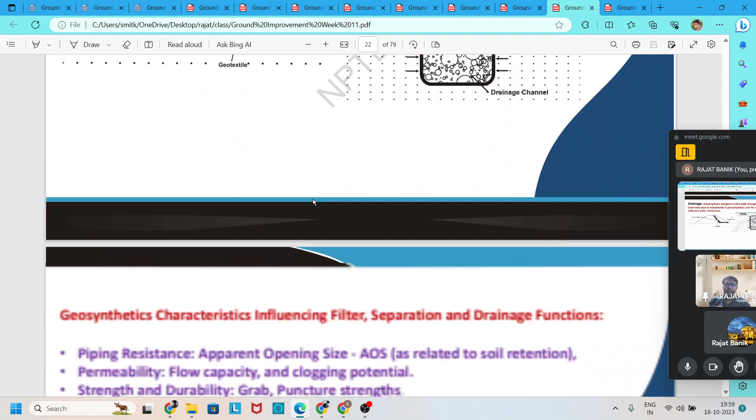We also study the different load transfer mechanisms while using it as reinforcement, then the failure modes for separation, filtration, drainage, and barrier protection. Please go through it.

Then used as a road - this geosynthetic material is mostly used for road and pavement, and also used to improve or stabilize embankments. Please go through this.

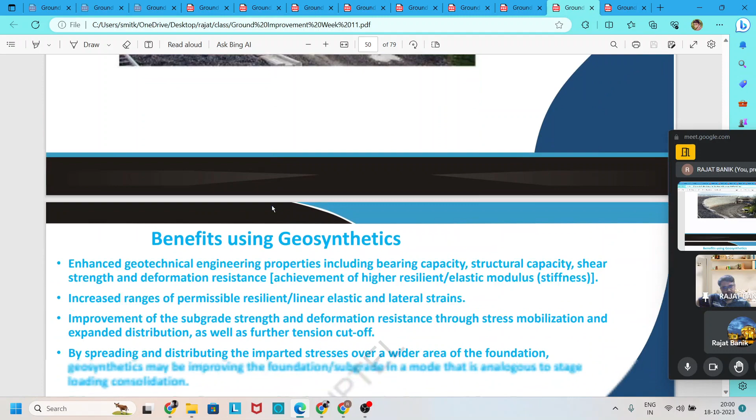In the previous week we discussed everything. Then we use geosynthetic material to create mechanically stabilized walls, or mechanically reinforced walls. Also study the benefits of using these geosynthetics.

Basic concept of this mechanically stabilized wall, study the failure mechanism of this mechanically stabilized wall, the load transfer mechanism, active earth pressure theory like Rankine theory, Coulomb theory, and the active earth pressure coefficient. I will try to solve one problem in the next class.

In week 12, we also solve one problem based on this mechanically stabilized wall. Some specifications are given for this mechanically stabilized wall. Go through it once - the design procedure of this mechanically stabilized wall, creation of the wall.

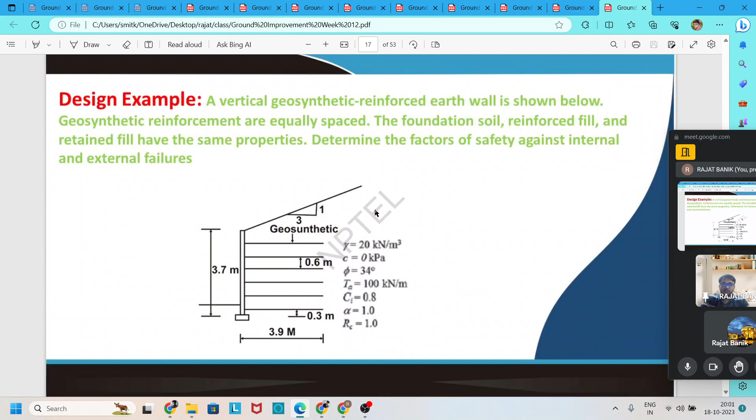After that, we also study slope stability, here in the problem of the mechanically stabilized wall. Go through this and try to remember the formulas applied in this problem.

Then we study geosynthetic material used to stabilize the slope as a reinforced slope. Study the principle of reinforced slope, types of reinforced slope, and the different types of spacing based on soil type and face angle.

We can see different failure modes. So go through all of this and try to remember as much as possible.